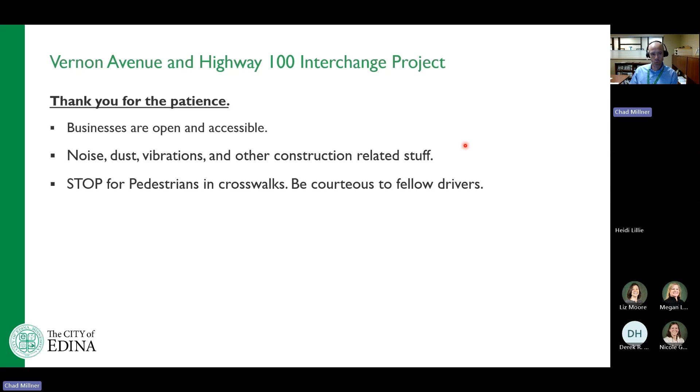Businesses are open and accessible. We're all dealing with noise, dust, vibration, rain, and other construction-related stuff. Be courteous to fellow drivers, and stop for pedestrians in the crosswalks on Eden Avenue and around the roundabouts. That's only going to get a little worse as we start closing on and off ramps of 100, starting soon for one of them, which I'll share shortly. Project goals, as we've seen before: improving safety and mobility for all users once complete, improving traffic operations, consolidating access points, and a few other items listed.

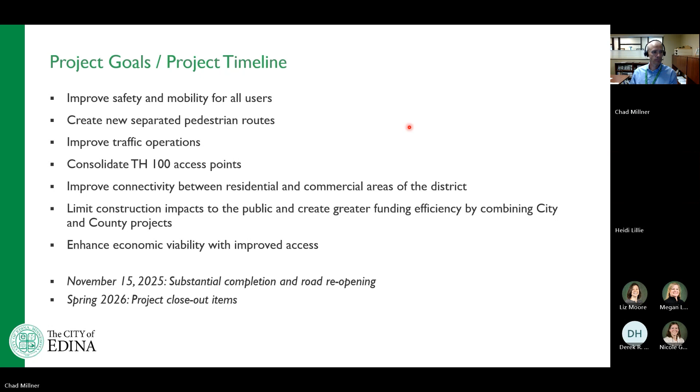Schedule-wise, it was bid with a completion date of November 15th of this year, and there's still an issue we're concerned about that may affect that schedule, which we'll talk about shortly. This is the project from Grange Road on the east over to the Interlachen and Vernon intersection, including the parking lot and front area of Edina Grandview Liquor on the west side of the project.

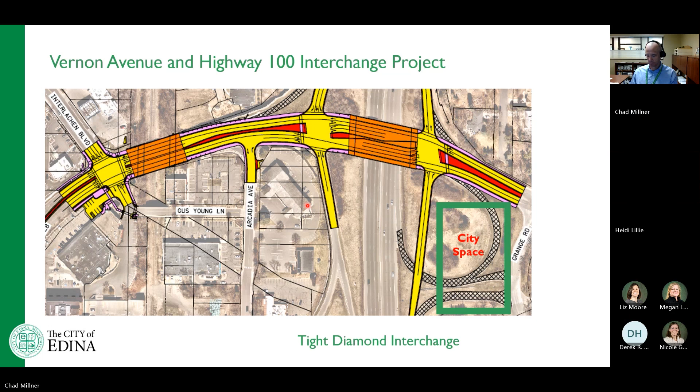All the various communication methods—people should be very familiar with these. BetterTogetherEdina.org is your main source of information. We have new maps we've just finished that will be posted for the next change in traffic operations, which I'll get into shortly. When we make those traffic changes, we do a lot of updates using press releases, social media, and emails. Look for updates coming very soon through those channels with this latest traffic change.

So let's zoom in at Interlachen Boulevard and Vernon Avenue. This is a free-flowing intersection. Right now traffic is closest to the Caribou corner. Gus Young is again closed at Edina Liquor. There have been lane shifts to complete underground work. They've done the curb and gutter, and they've done some of the grading.

They're going to be paving early next week, and then they'll flip traffic over this way. Instead of being on the Caribou corner, they'll flip it to the Edina Liquor side and make that free-flowing in this direction so they can do the pipe work over on the corner adjacent to Caribou. The work in front of the Edina Liquor Store will be complete early next week.

The curb and gutter went in, and they started doing the sidewalks yesterday. They were going to pour the rest of the sidewalks today, but then we had a little rainstorm, so I don't know what their updated schedule is right now, whether they'll continue pouring today. But the concrete work will be done this week.

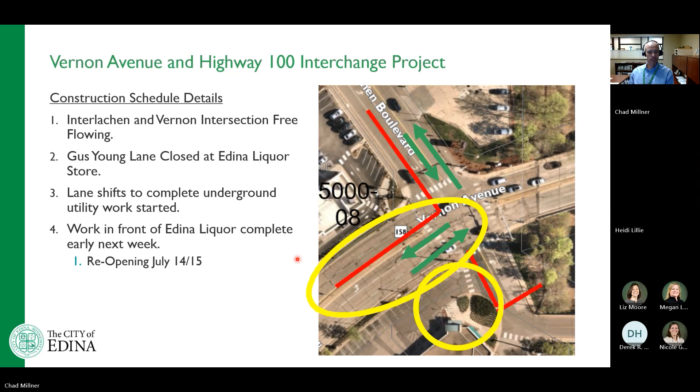So liquor operations are deciding when to open that store. Sidewalks will be open and accessible, but the parking lot itself will stay closed until Tuesday morning. Then we'll have our sign shop come do the pavement markings for the parking stalls later that week, very early in the morning. That's the update on that intersection.

The other issue we're concerned about, which we talked about at the last meeting, is this Xcel power line that was horizontally and vertically different than what we thought in the plans. This is the west support for the Vernon Avenue Bridge. Here's the railroad—it was struck and repaired. There are some old agreements between CPKC Rail and Xcel, but they don't cover this line. The railroad says you need a new agreement.

Xcel was willing to move this, and our contractor is willing to help move it, but without new agreements showing this line—not an aerial line—the railroad won't approve the work and Xcel won't do the work. So they're in that process now, requiring permits and agreements. There's been some movement on the plans in the last week, and we're hoping this gets cleared up, everything signed and permitted, in the next couple of weeks. Otherwise, it's going to be some major impacts to the schedule.

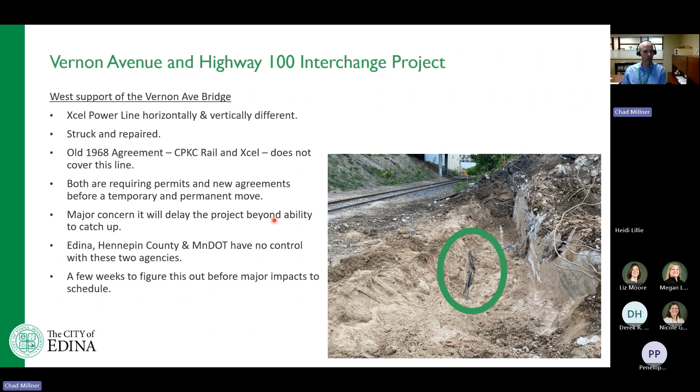Edina, Hennepin County, and MnDOT don't have any control over these two agencies—they have to work it out. We keep asking every couple of days where they're at, but we're concerned, and hopefully we can get it figured out and continue working on this. I'll show you the difference on the east side versus the west side of this bridge on where they're at from a construction standpoint, in some pictures. The impacts you're going to see in the next week are scheduled for Monday, July 21st.

We're calling this the road closures detours for stage 3. Stage 3 was both ramps on the east side on and off and the west side. They're going to break that into 2 parts. So part 1 is this east side over by Grange Road and City Hall.

So this will be the first stage 3A part 1. Northbound on-ramp is scheduled to be closed July 21st until early fall. That allows them to build a noise wall that connects down by Minnehaha Creek and comes up this tree line all the way up to 50th Street. So they can make room and build that noise wall, store equipment, do the grading operations, all the stuff that's needed that they can't do when traffic is using that on-ramp.

Now I'm going to show you a map that shows what the detour is. Can you see this map now, Liz or someone? Yep, I can see it. Okay, great. So this is the interactive GIS map that's on Better Together. This is what's out there today. So all the green, you can take the southbound exit ramps around Hilltop, and you can currently take northbound 100 off of 50th. You notice these other tabs on the top.

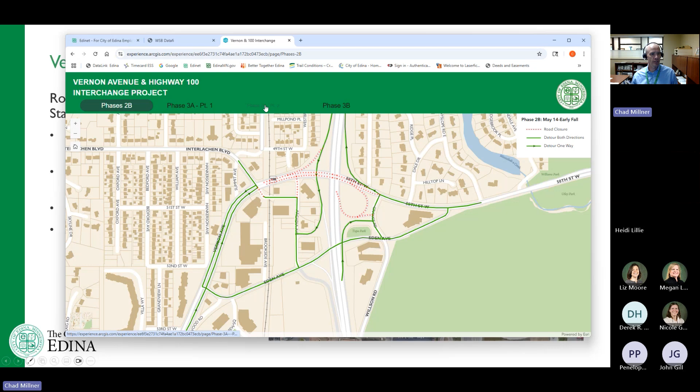So 3A part 1 is this one where you're closing that on-ramp. So it's all red X'd out. So how do you get onto northbound 100?

There's 2 options shown on this map. The local option is you use the frontage roads, the purple. You go down the Vernon Avenue, and there's an on-ramp right here at that location to get on northbound. So that's more the local route. Use either frontage road and Vernon Avenue.

The official detour route, the regional one, is you go down, get on southbound 100 at Eden, go all the way down to Highway 62, take eastbound 62 loop, take that exit, then loop again on the northbound 100, and then you are on northbound 100.

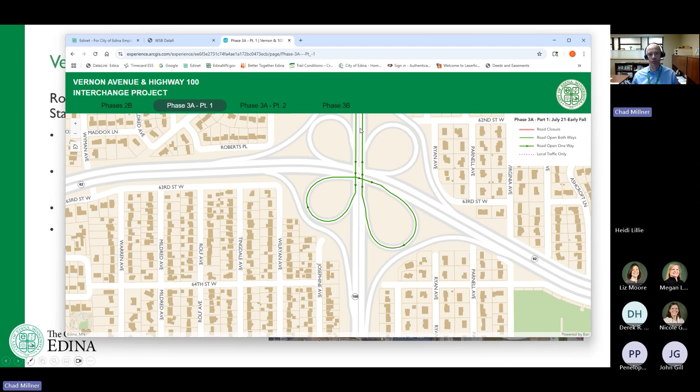Continue on your way. During this phase 3A part 1, a little northbound off ramp to Grange is still going to be open, and the southbound 100 exit ramp is still going to be open. So we're closing 1 additional ramp here. It's at northbound 100.

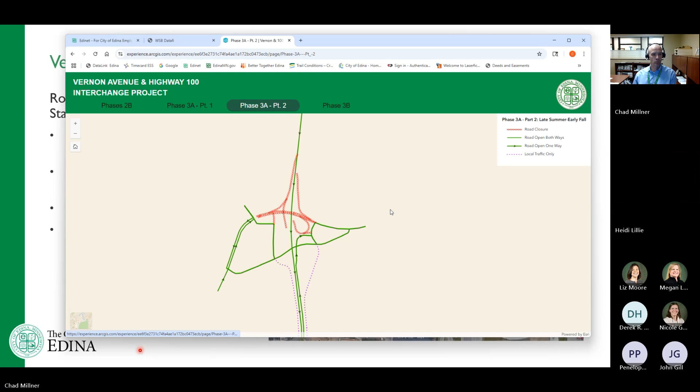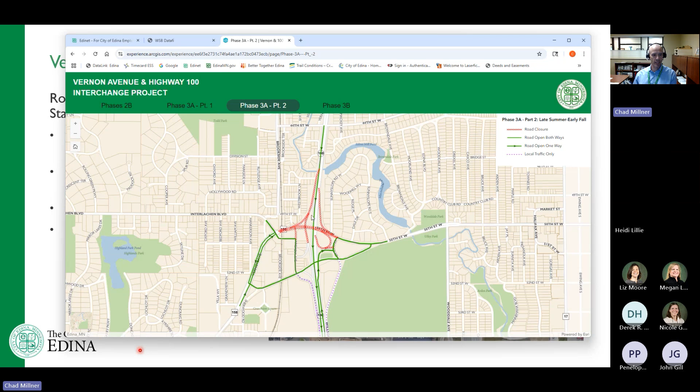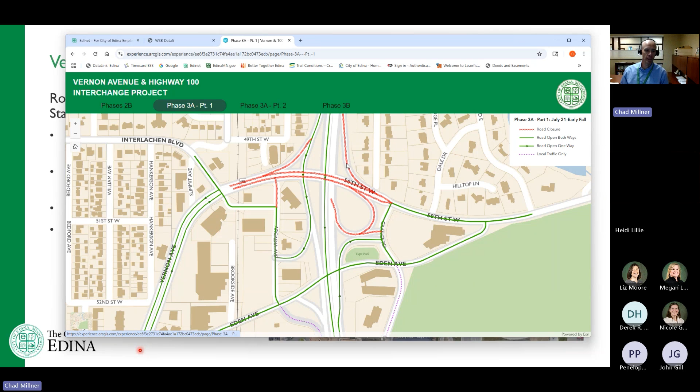And we'll go back. At some point later this summer, we still don't know exact dates, part 2 will occur, and this will, I think, have the most impact to traffic, when we close the west side or the southbound off ramps. We don't know dates yet, but we're starting to develop the maps for that. The detours will be very similar, where you can use Vernon Avenue or Highway 62. So look for more information on that coming. We're really focusing on just that part 1 of 3A with that northbound Highway 100 on-ramp at 50th closing July 21st.

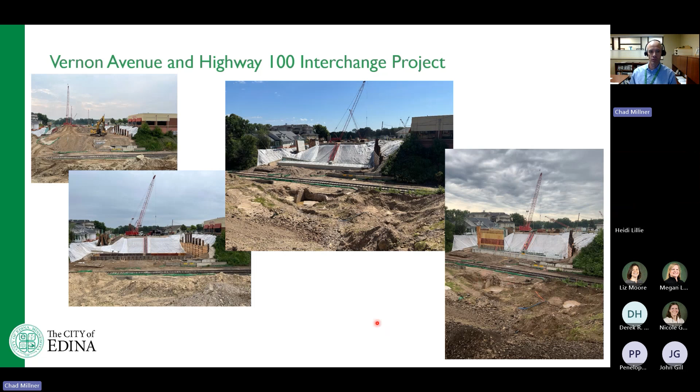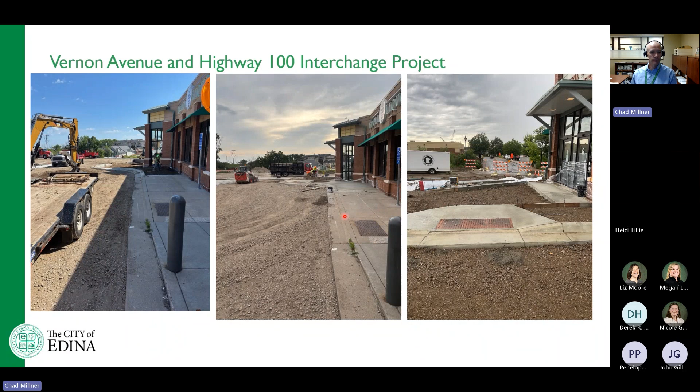Same area looking the other direction, back towards the west. You can see the curbs that were installed, your traffic signal base here. This was from beginning of the week, end of last week. And then here's a picture from this morning where the sidewalk's been poured, the base for the new signal poles is there, and they're getting ready to pour those additional sidewalks in front of the liquor store.

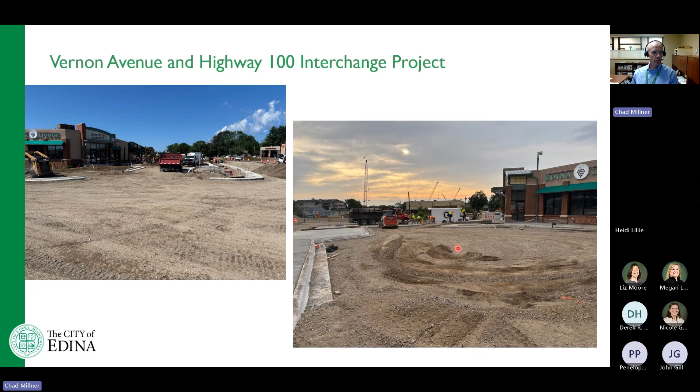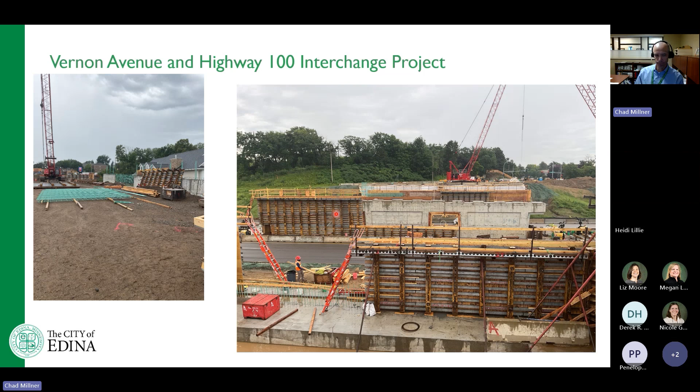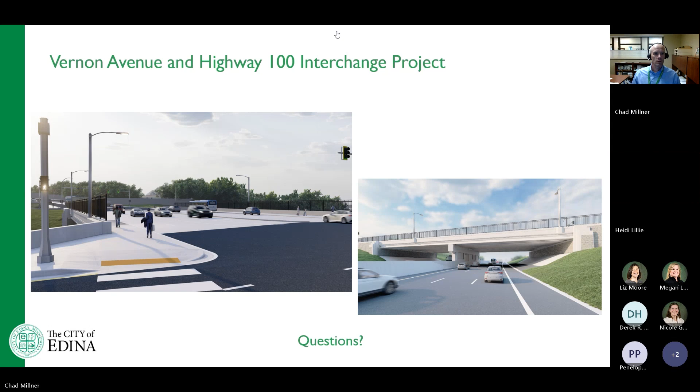When you say south ramps, is that plural for both—like the ramp that goes from Eden onto Highway 100 south? That one will be open for the duration of the project. Eden Avenue to southbound 100 will be open the whole time. We have plans to close that ramp after the entire project is done, but for the 21st, it's just the northbound on-ramp to northbound 100 off of 50th—that little slip lane is the only one closing on the 21st. Great question, thank you.